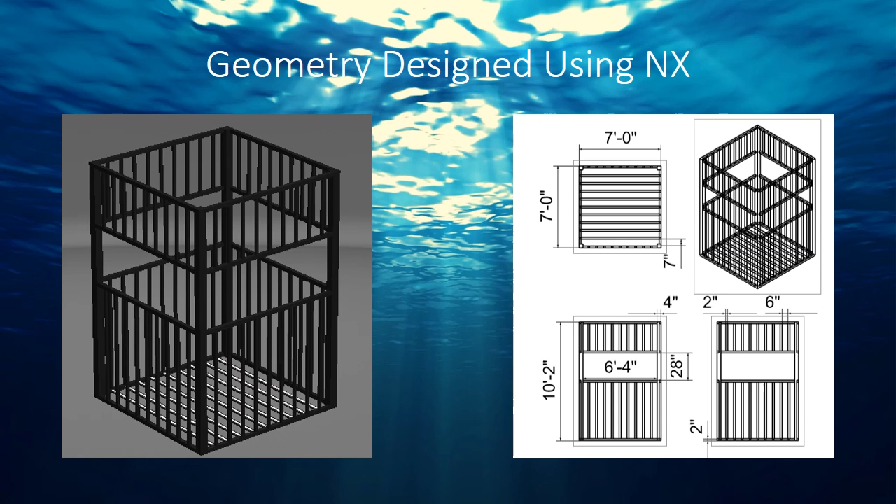So here is our structure. It's a 7 by 7 by 10 feet 2 inches cubic structure. We modeled it like this from a similar structure online. We use coarse mesh instead of fine mesh for our structure because we found the coarse mesh gives similar results as fine mesh, and it takes much less time for the solver to solve. Our structure is made of steel and has a maximum strength of 58,000 psi.

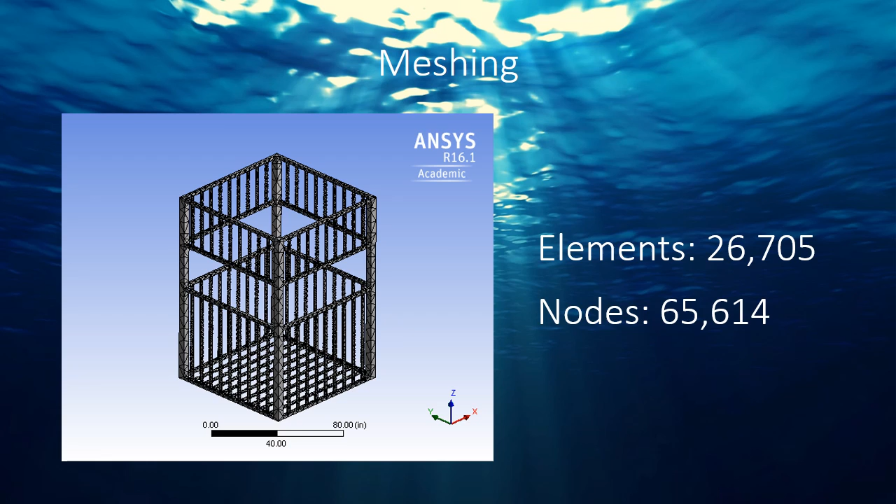We use three different types of sharks to attack our shark cage: the hammerhead, the bull shark, and the great white. Here is a table. We can see the hammerhead has the smallest bite force and weight, the bull shark has medium, and the great white has the largest bite force and weight. For the max speed, the bull shark is slowest and the great white is fastest.

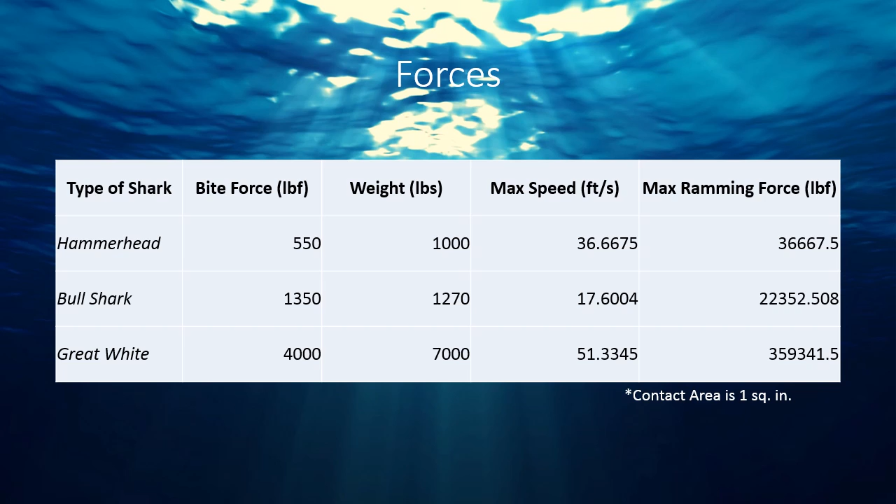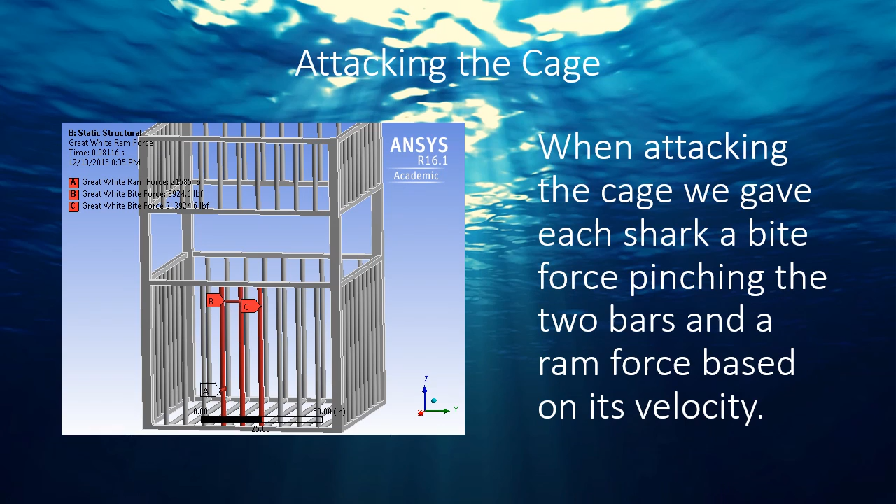We set our top surface to be fixed. This is just a simplification because in real life it is attached to the boat and can actually move a little bit, but we think this is accurate enough for our analysis. We have two forces pinching on each side representing the biting force, and we have a force at the front applied on those three beams representing the ramming force.

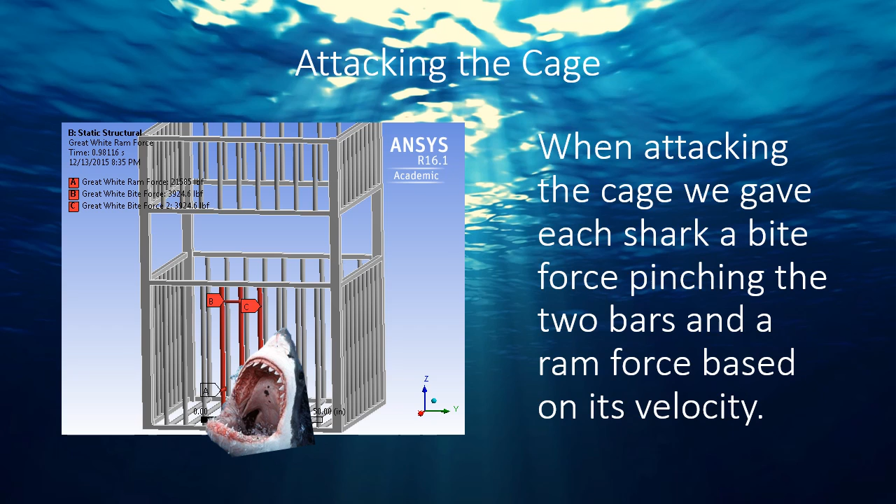First, we have the hammerhead results. On the left is the cage right before breaking, based upon the maximum stress the material can withstand. We modeled that first, and then on the right is the cage with the same bite force but with the ramming force maxed out, so assuming it was going the max velocity. We used the ramming force of 22,000 pounds as the max force, and then used that to calculate what velocity the shark could be going at.

And then at the bottom there in the table, you can see the percentage of the velocity that would be allowed. In other words, if the shark was going 60% or faster of its max speed when it hit the cage, it would break. And that breakage is in the right hand picture.

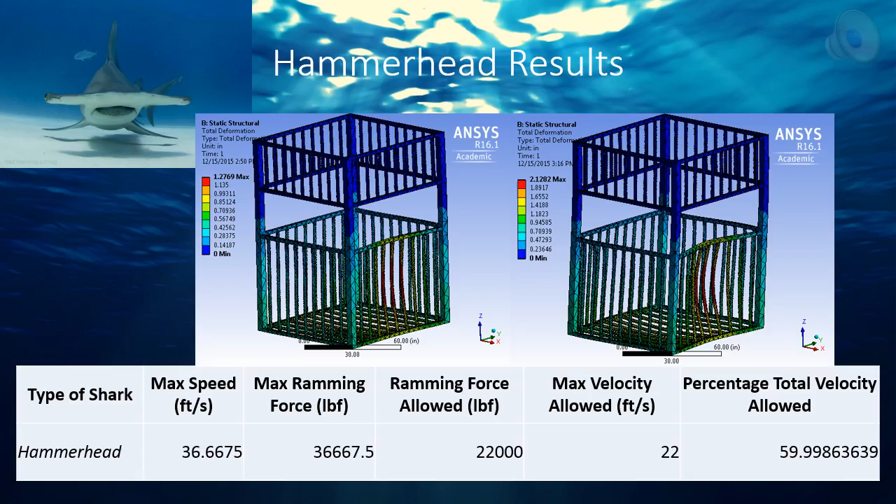Next is the bull shark. The bull shark has the same setup as the previous one. The cage, however, will no longer be breaking, and that is because the bull shark has a much smaller velocity and total weight. And as you can see in the bottom right, the percentage of total velocity is nearly 100%, so this cage is safe to use with just bull sharks.

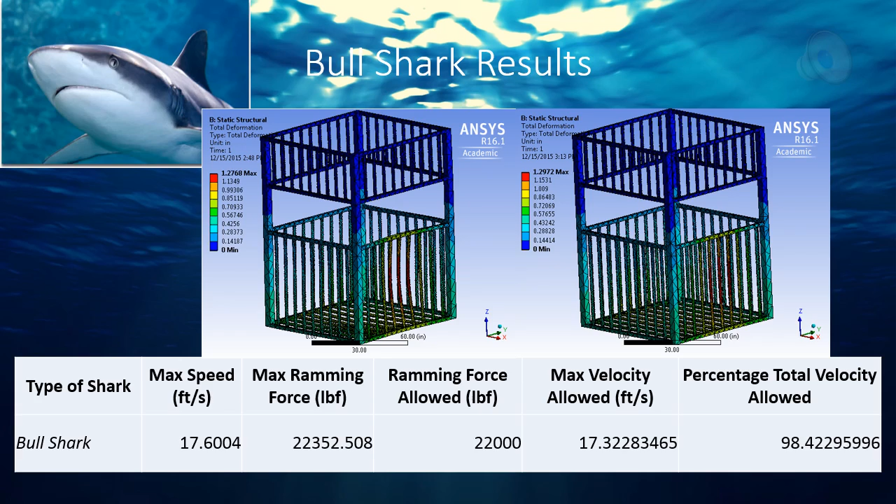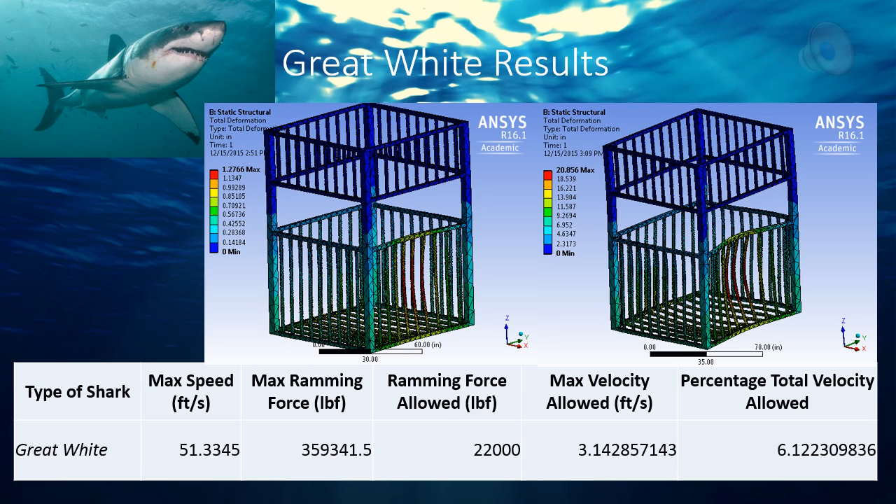Next, there's the great white, and as most of you know, the great white is much larger and faster than the other sharks. As you can see on the right, the cage is clearly breaking. It has a deformation of about 21 inches. And for it to do that, it would be going at full velocity. However, for it to break the cage at all, it would only have to be going above 6% of its total velocity. So this cage is not very safe for great white sharks.

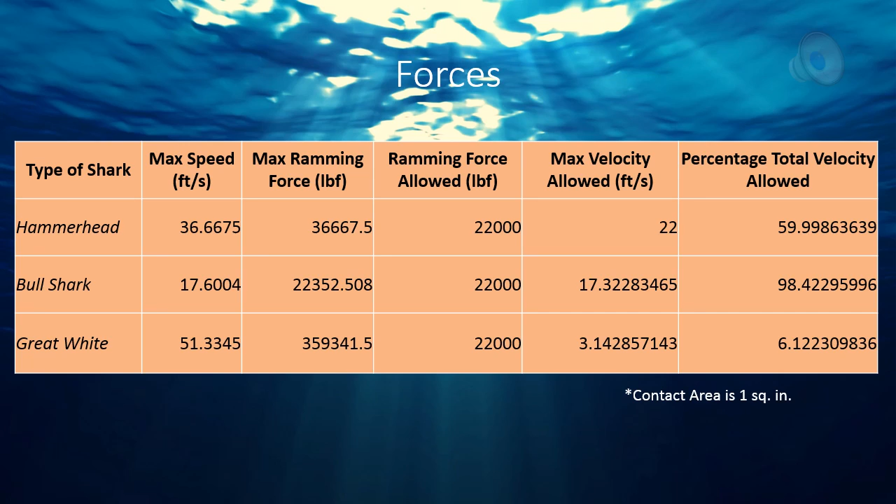Here we have a table showing all of our results. As you can see, the great white is much stronger than the other sharks and only has to go faster than 6% of its total possible velocity to already break the cage and possibly damage or injure the people inside of it. This is a video of the cage breaking due to that 22,000 pound max ramming force.

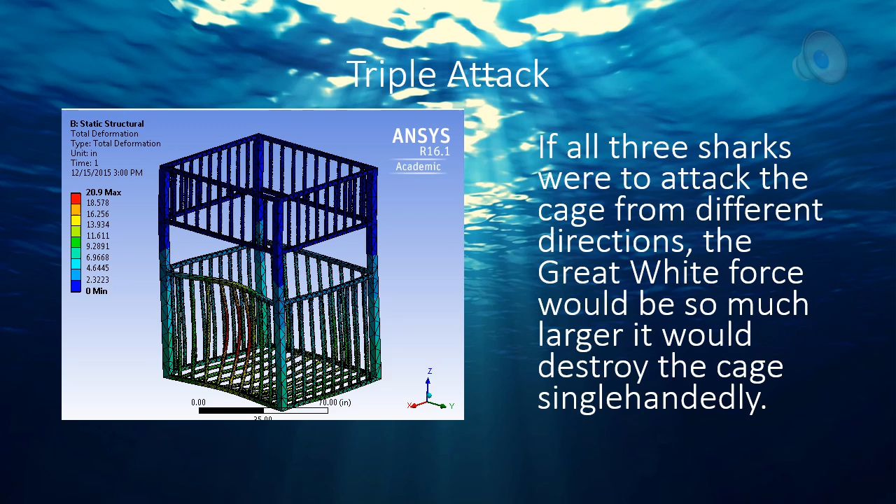Finally, we decided to do one last test where we had all three sharks attack the cage going at max velocity. On the back is the hammerhead, the front right is the bull shark, and on the front left is the great white. As you can see, only the great white really causes any noticeable results, and this kind of goes along with our data and proves that the forces exerted by a shark that big are so much more that it overshadows every other shark that is attacking the cage.